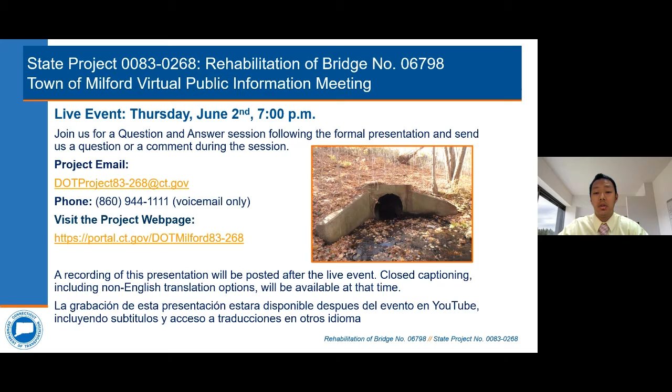My name is Jonathan Kang, and I'm a project engineer with the Connecticut Department of Transportation. Before we begin the presentation and introduce the project team, I would like to go over a few housekeeping points and explain the format for tonight's meeting. The meeting will consist of two parts that last approximately 20 minutes each. The first portion will consist of the presentation of design by the department's consultant engineers for this project, Mott MacDonald, who are structural lead, and BN Engineers who are the highway lead. This will be followed by the second portion where we will host a live question and answer session.

On the next slide, I will explain the three means by which we will be able to communicate. There are three means by which you will be able to communicate with us during the live question and answer session. Questions can be submitted via email, calling and leaving a voice message, or if you're joining us on Microsoft Teams, you can use the chat window at the right side of the Teams window. The project email, voicemail, and chat box will be screened by the project team during the question and answer session. Answers to all questions will be posted in the chat window, and all questions and answers will be read out loud. Questions may be asked at any time during the presentation, and they will be answered during the question and answer session.

The primary means by which to communicate with the project team will be via email at dotproject83-268@ct.gov, as it is currently shown on the slide. Phones can be used by calling us at 860-944-1111 and leaving a voice message. And lastly, once again, the chat box can be used if you are joining us through the Microsoft Teams application. The question and comment period by email or phone will be open through Thursday, June 16th, 2022. Therefore, questions or comments that are thought of after tonight's meeting may be submitted until June 16th, 2022 via email or voicemail.

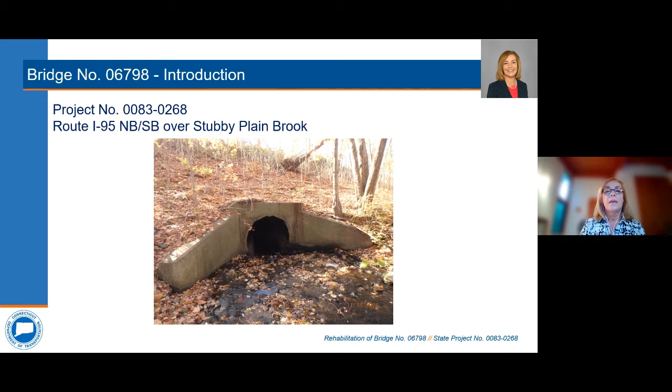There are a few buildings near the site. To the north, at the inlet, is the West River Healthcare Center, and the Orange Avenue Elementary School is right across the street from the healthcare center. We also have the Calvary Church to the north of the health center. The southern side of I-95 is mostly a residential neighborhood.

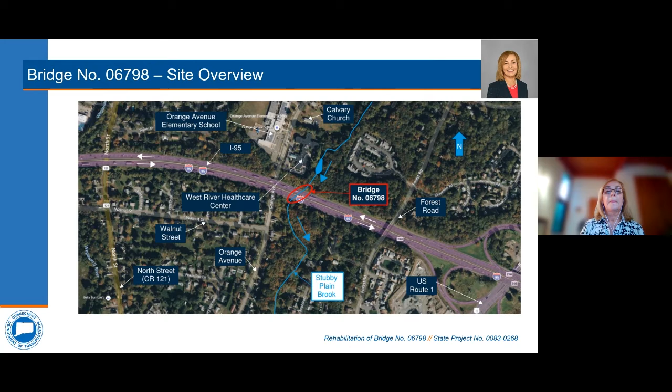Taking a closer look at the existing bridge location. So the bridge was constructed in 1958, the same time the highway was built. The bridge has about a 25-degree skew to the roadway. I-95 has 3 lanes in this direction. In this location, they are all 12 feet wide. There are right shoulders and left shoulders on both the southbound roadway and the northbound roadway, and a concrete median barrier that separates the 2 roadways.

The highway is relatively flat at this location. The posted speed limit is 55 miles per hour. The average daily traffic is about 132,000 vehicles per day, and 15% of that is truck traffic.

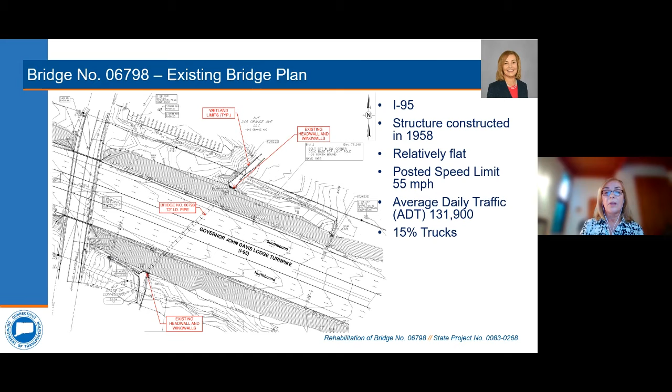The next slide shows the existing bridge. As I mentioned earlier, the bridge is a round asphalt-coated metal pipe culvert measuring 6 feet in diameter. It was constructed from corrugated steel plates that were bolted together. The pipe is approximately 259 feet long, and it has a slight slope of about 0.2%. The culvert is pretty deep under the roadway. There is about 25 feet of fill and bituminous concrete pavement on top of the culvert.

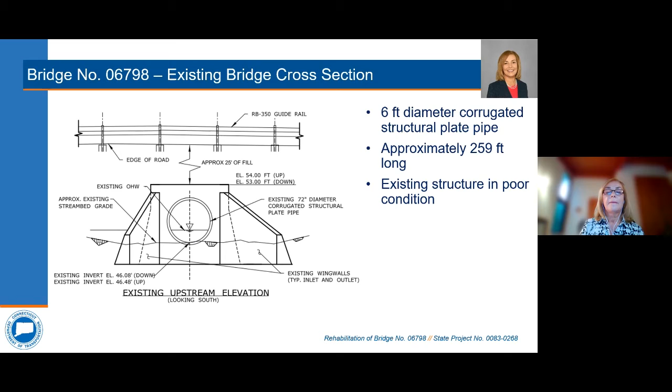As you saw on the previous photos, the pipe has reinforced concrete head walls and wing walls at both the inlet and the outlet ends. The steel pipe is in poor condition. I will show you some details on the next slides. So as you can see, there is deterioration to the protective asphalt coating inside the pipe. There are random rust holes measuring up to 3 inches in diameter along the waterline. And the photo on the right shows the laminated rusting along the waterline.

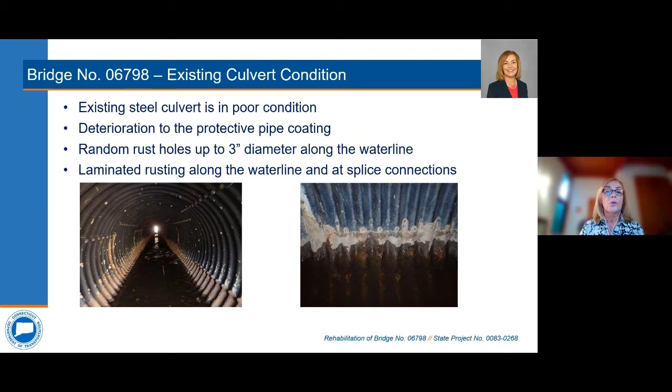On the next slide, we have some more close-ups of the existing pipe. Near the inlet, there is about a 40 feet length of pipe where it has significant deformations. You can see it on the upper photo, and the picture in the corner shows the holes at the connections where the pipe is rusted out completely.

The table on the bottom summarizes the current condition rating of the culvert as it was recorded during the 2019 inspection. You can see the steel got a poor condition rating of 4. So because of all of this deterioration, the bridge is considered to be structurally deficient and it needs rehabilitation.

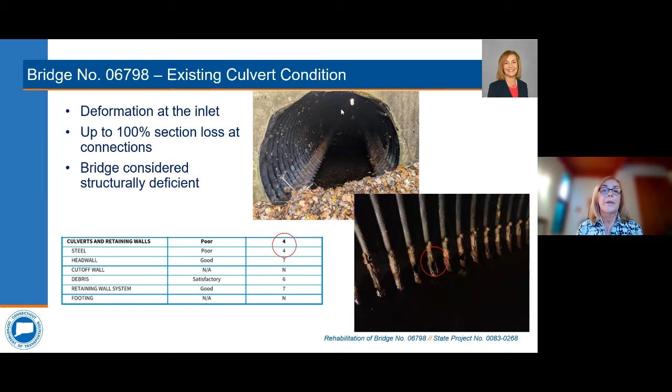Next, the culvert will be repaired by slip lining with a 63-inch diameter smooth interior aluminum pipe, and the annular space between the new pipe and the old pipe will be grouted. There will also be grouting needed behind the existing pipe to fill any voids in the soil behind the existing culvert. Next, new head walls will be constructed, including cutoff walls and flared wing walls at both the inlet and the outlet.

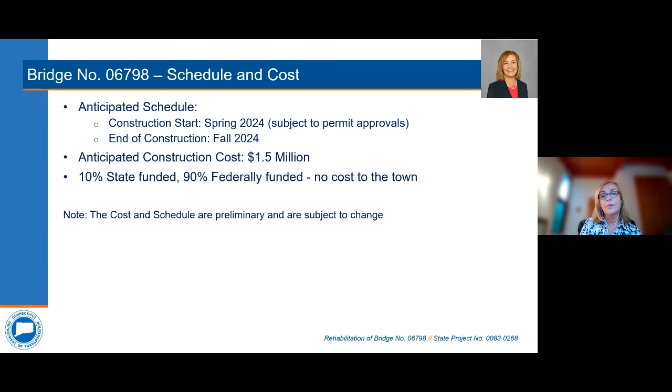So this concludes our technical presentation, and I will turn it over to Aaron Foster from CHA to start the question and answer session. Thank you. Thank you, Ildiko. This begins our question and answer session for this project.

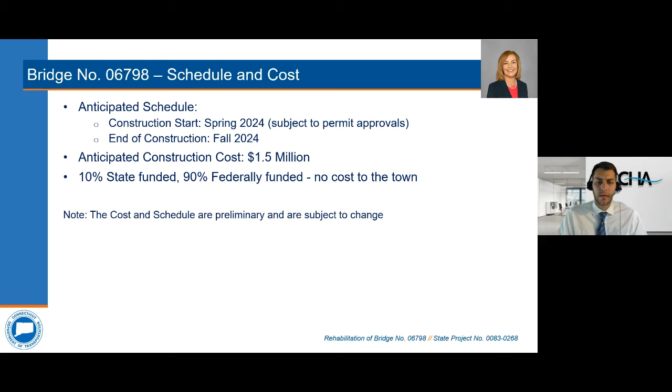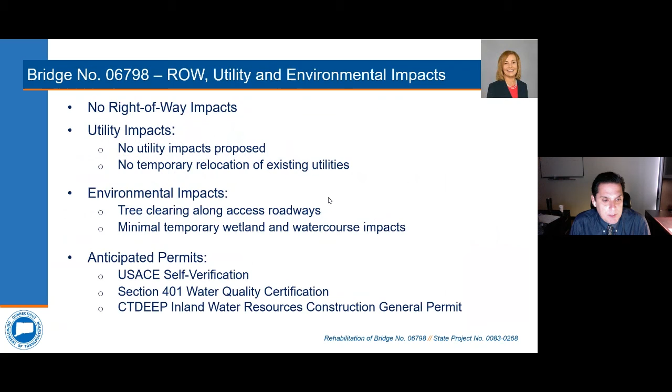I think we just got another question. When are the anticipated impacts to pedestrian traffic, particularly the schools? Bob, I'll let you answer that one. Can you go back to the slide with the MPT? So the plan for this project was for it to start in the spring of '24, which would put it mostly being done during the summertime. That's the goal, because we know to avoid the school traffic and to avoid impacts to the school. That's why we're picking that time.

There's a long process to get to that point, but that's why it was timed the way it was, to minimize disruption to the public. Thanks, Bob.

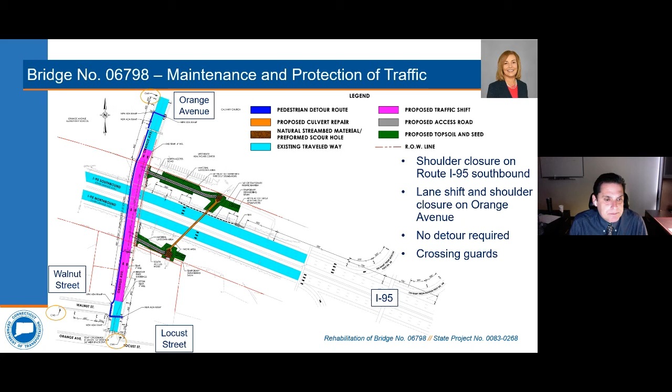All right, we see one more question. Question asked, will the access roads be paved? Ildiko, can you take that one on? Yes, sure. So the access roads will be first used for construction, and they will be covered with a 12-inch processed aggregate. And at the end of the construction, they will remain because they will be used for future maintenance and access for inspections and so on.

But they will be covered with seed and loam, so to avoid any potential erosion. So they will look fairly natural at the end of construction. Thanks, Ildiko.